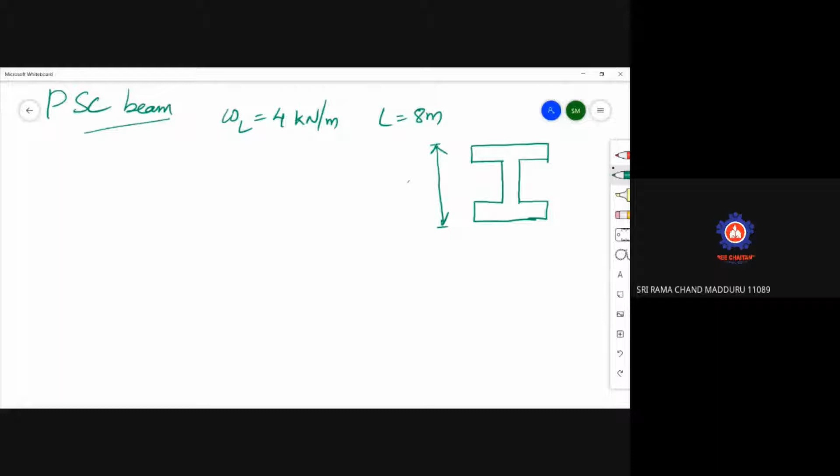The beam has an I section as shown in figure. So this is an I section. You can draw this diagram. So this is a symmetrical I section. So the flange thicknesses are 60 mm, web thicknesses are 80 mm.

The beam is to be pre-stressed by an effective pre-stressing force of 235 kilonewtons. So capital P is equal to 235 kilonewtons.

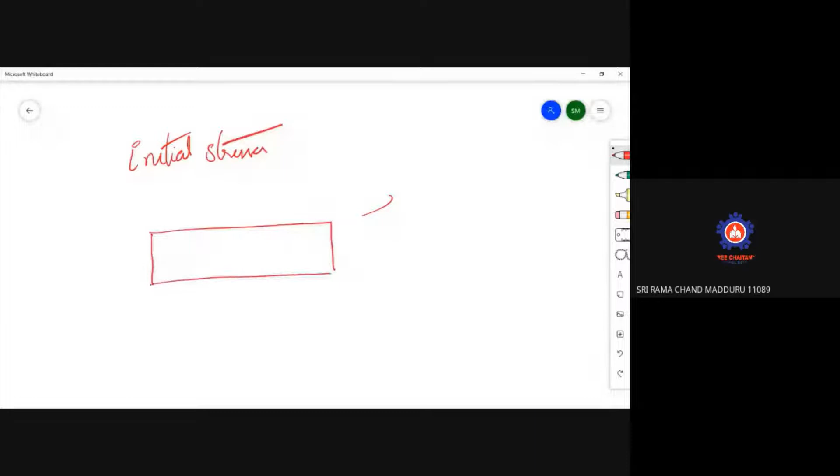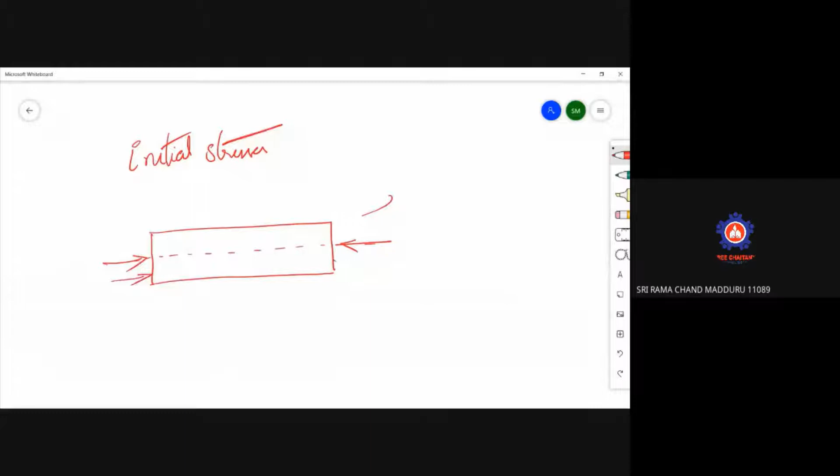So just understand this sentence: the stresses across the section are practically compressive. That means if your beam is there, for a pre-stressed concrete beam, we are applying a pre-stressing like this. Whether it is below the neutral axis or above the neutral axis, at an eccentricity of E, in such a way that for the entire concrete beam, if you take the cross section either at the central section or at the support section, the resultant stresses should be compressive.

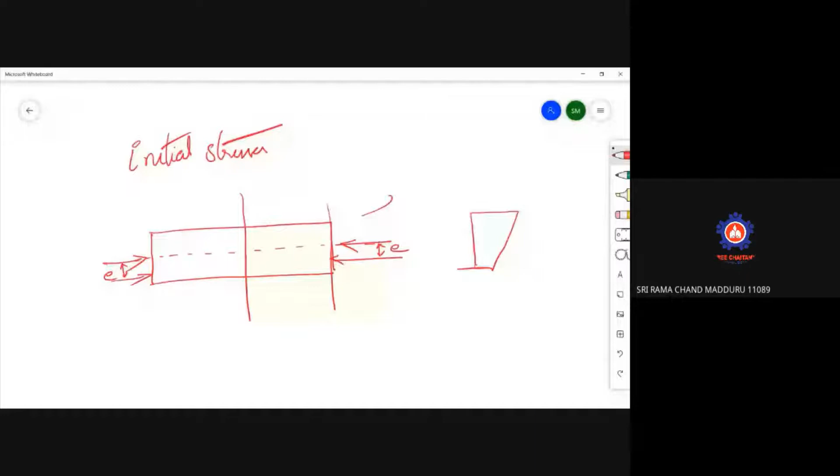That's why we have analyzed the beam, how to calculate the resultant stresses. On the entire cross section, there should be compression. Just understand here, the loading you can't avoid. Why? Because the loading is coming according to the requirements of the building. So what we can do is play with only the pre-stressing force as well as the eccentricity E.

Sometimes you can change the dimensions of the cross-section of the beam, but sometimes the dimensions of the beams are also restricted. So the main thing is you have to provide the pre-stressing force as well as the eccentricity in such a way that the stresses are within the limits. Since we are providing it in a planned manner, we call it PSC, pre-stressed concrete.

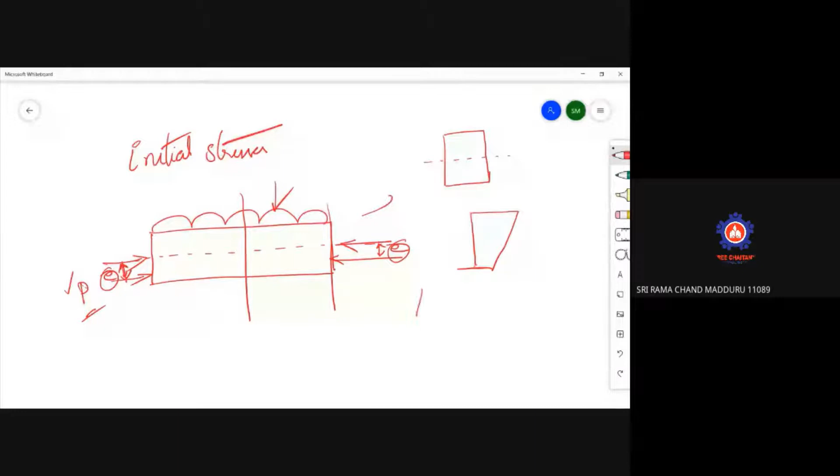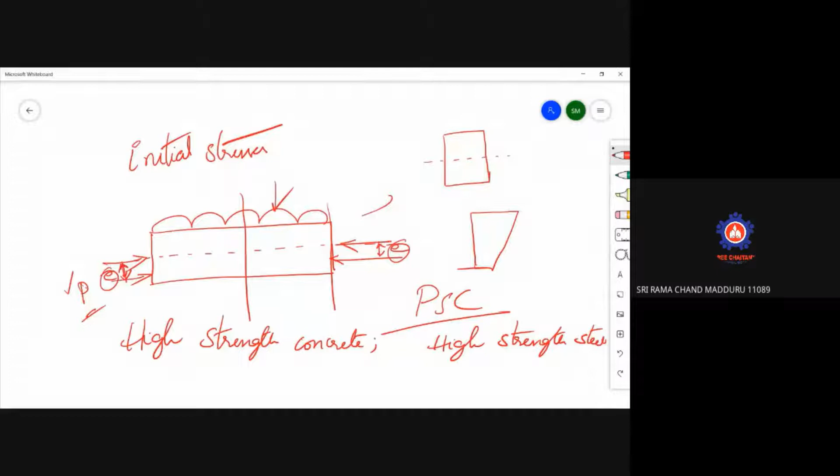For this, we require specific types of materials. We require high strength steel as well as high strength concrete. Let me tell you why it is happening. So note down just one point: high grade concrete and high tension steel wires are used.

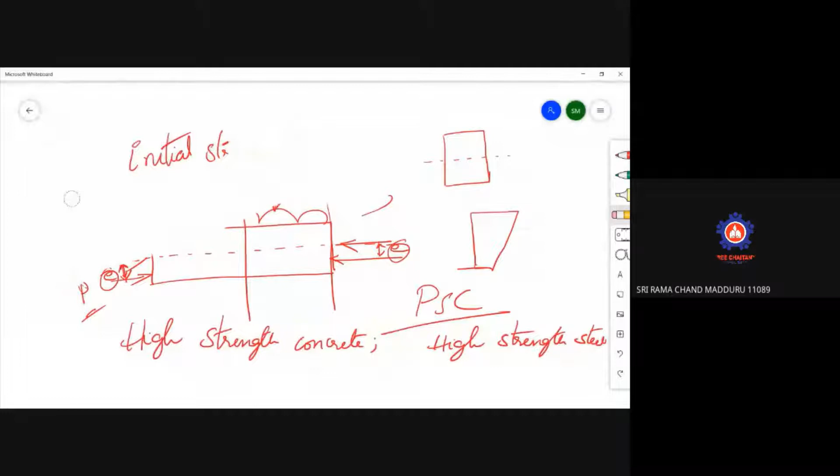High grade concrete and high tension steel wires are used. Steel wires are called tendons.

Okay, now I will go to the types of pre-stressing. Just keep the heading: types of pre-stressing. In the types of pre-stressing, these are majorly classified into two: one is called pre-tensioning, and another one is called post-tensioning.

Today we will understand these two terms, as we have only 10 minutes. In these 10 minutes, we will see what is meant by pre-tensioning and post-tensioning, what the words actually mean. We call it pre-stressing because initially you are doing pre-stressing before application of the external loads. The word itself says it. This pre-stressing is again divided into pre-tensioning and post-tensioning.

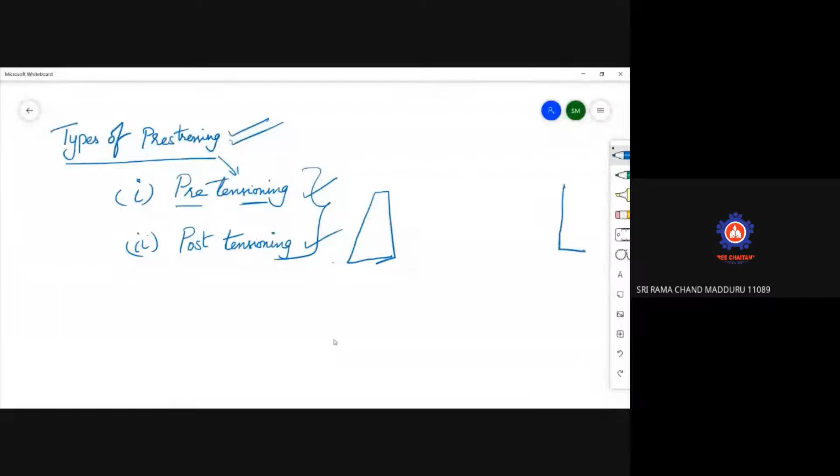Now the word again, pre-tensioning. That means you are applying the pre-stressing to the member before the concrete is poured. So in the case of pre-tensioning, first of all, there will be two abutments. The purpose of these two abutments is that the steel wires will be placed here like this.

Before the concrete is poured, first of all the molds are set, concrete molds are placed here. Wherever the tendons are required, the tendons are provided as per the design. We will do the design also here. So first the empty molds are placed. Now between the two abutments, the steel wire is placed and it is pre-stressed. One end is fixed here and you apply a force using equipment. We will also see that equipment and how to do pre-stressing. So we apply a pre-stressing force.

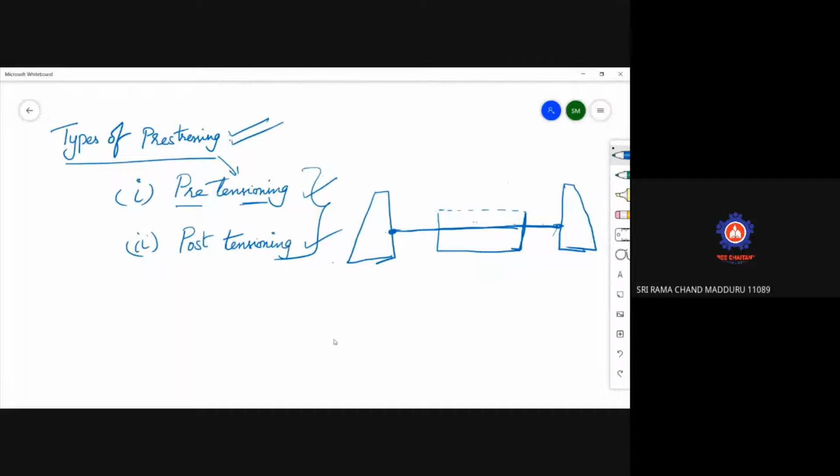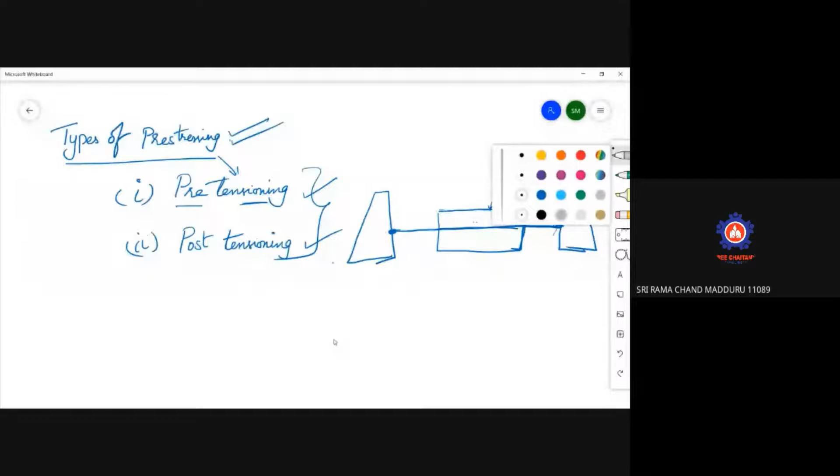So before the concrete is poured or before the concrete attains its strength, you are doing pre-tensioning, which means you are doing pre-stressing. Afterwards they pour the concrete. So after pouring, this is our concrete, poured here like this. After pouring the concrete, these tendons stay placed like this until the concrete attains its strength.

When the strength is achieved, they do cutting here. They use cutters and cut it here like this. When they cut it, this element will be taken out. So what are you doing here when you are cutting it? Just understand, that is the concept. First of all, the wire is under tension.

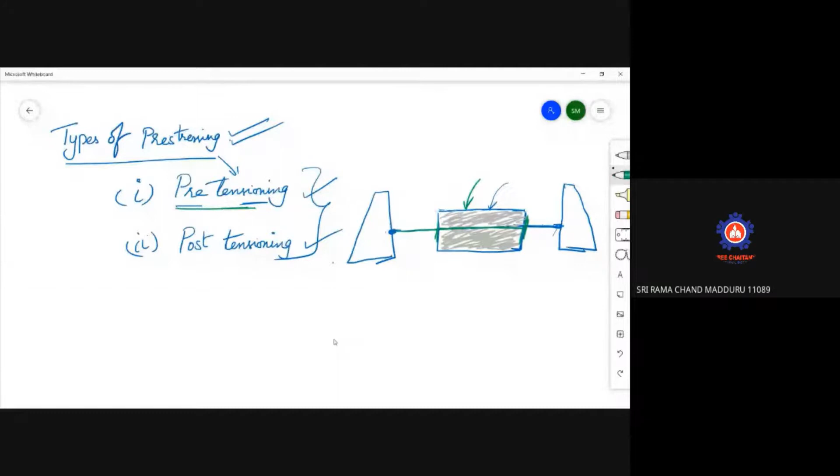You are initially doing pre-stressing. Once again I am repeating, listen to this one. I will talk regarding pre-tensioning today. So in pre-tensioning, what is happening is, here one abutment will be there. Why? Because to place your steel tendon or wire, a tendon will be placed here.

So here one end will be fixed. Now at the other end you will tighten it. When you are tightening it, the wire will be pre-stressed. So simply you will hold here and pull on this side, and the member will be tensioned. Before tensioning, they will place the concrete molds as per the required dimension. They will place them here and pull it, applying pre-stressing.

When I am applying pre-stressing, they will pour the concrete here. After pouring the concrete, we know that concrete requires 28 days to achieve its strength. So till 28 days it will be placed here, or as per the required strength. It need not be 28 days. If the member is achieving its required strength, you can cut it here. At the ends, the wires are cut and you will take it outside.

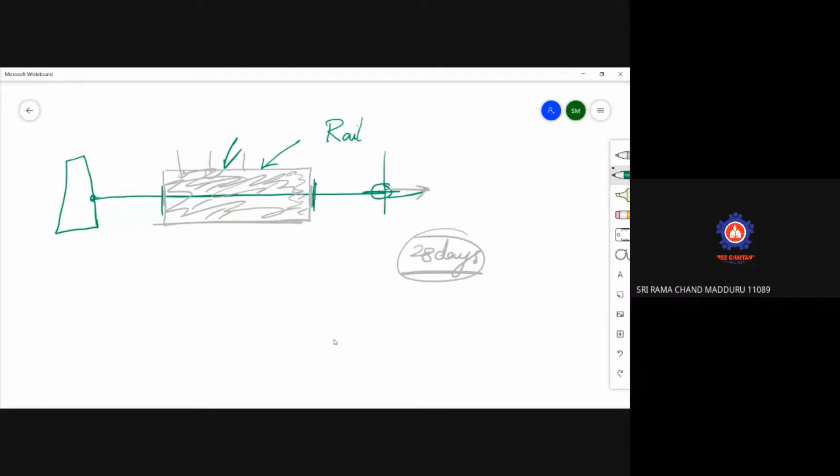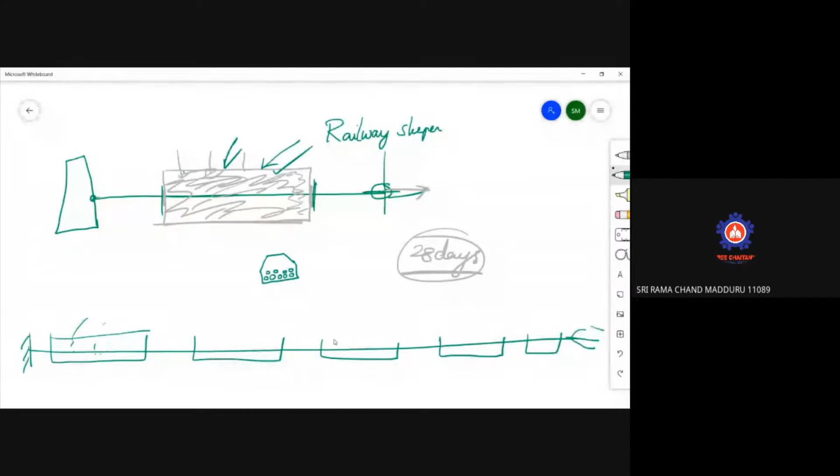First of all, a wire is provided over the entire length. One end will be fixed, the other end will be tightened using the equipment. Pre-tensioning will be done. Here a series of molds will be placed, and in one stretch the concrete will be poured. Here I am drawing only one single line; as per the required number of tendons, you will draw the required number of lines.

When I call it a tendon, this is nothing but a group of steel wires. These steel wires are called tendons. Now the concrete will be poured. After the concrete achieves its strength, you will cut it here. When I am cutting it and taking out the element, what happens?

Simply try it: take a rubber band and pull it. When you pull it, the rubber band will be under tension. When you release it, it tries to come back. When it is trying to come back, the problem is that the surrounding concrete is there. This will not allow it to slip.

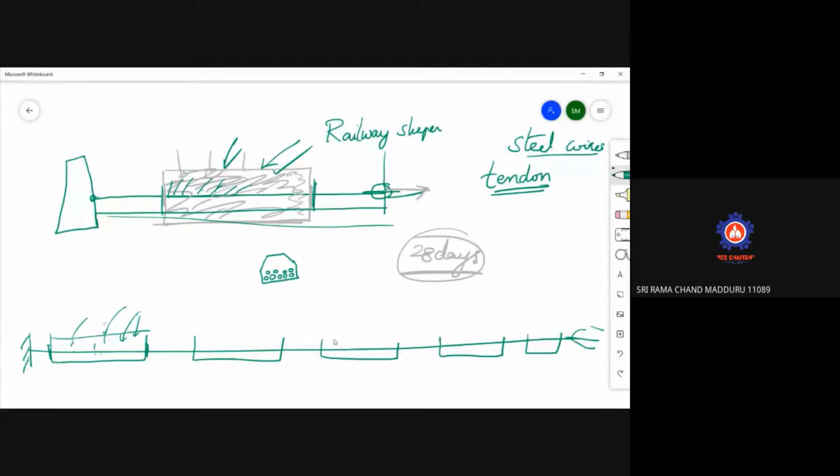So your member is like this, and you initially pull it. Your member is under tension. When you cut it, the member tries to come back like this. But the surrounding concrete will not allow it. So when it is trying to come back, it will induce compressive stresses.

Take a simple rubber band and release it. It will try to get back to its original position, but the surrounding concrete is there. This surrounding concrete has a good bond with the steel, so the compressive stresses from the steel will be transferred to the concrete through the bond between steel and concrete.

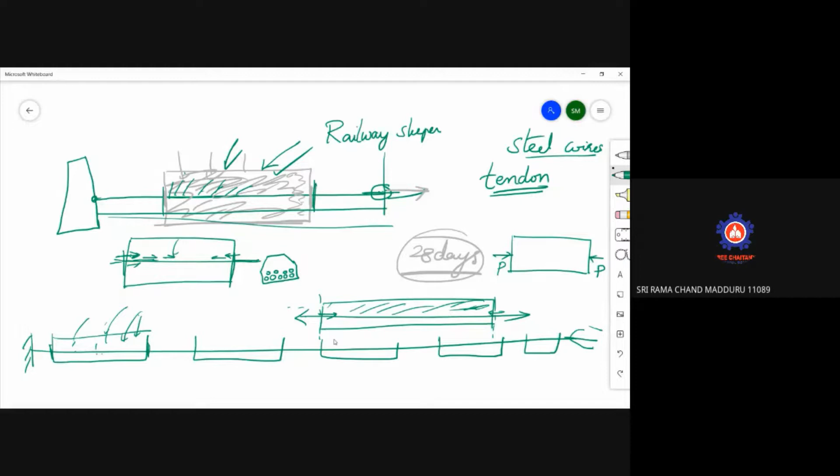That's why in the problems I am writing it as a pre-stressing force. But how is it coming? The member is initially stressed like this, and when it is released, the member tries to get back, but this is not possible as the surrounding concrete is there. Due to this surrounding concrete, a proper bond exists in pre-tensioning, so the compressive stresses will be transferred. This is the idea in the case of pre-tensioning.

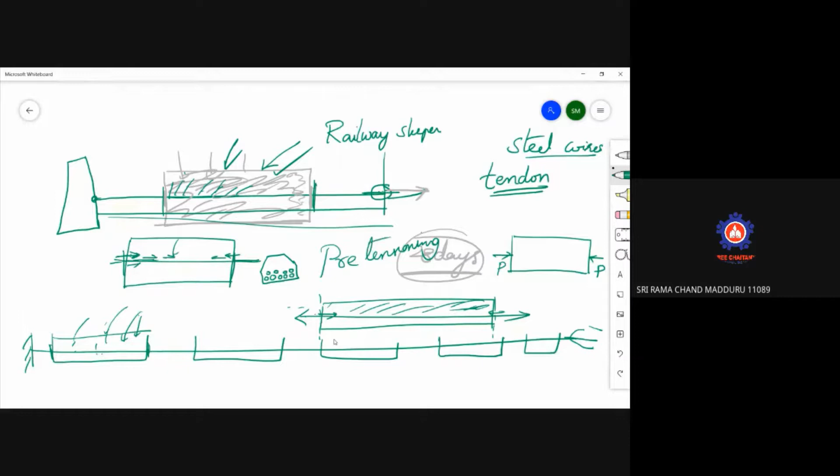So in the initial class, first day class, I tried to explain to you the history of pre-stressing. In the history of pre-stressing also the same thing happened. Take a wooden barrel like this. In the olden days, they used to store wine in these wooden barrels for longer durations. One person observed that when the grape juice was poured inside, it created pressure on the surrounding members, and due to this the barrels were broken; they did not have good stability.

So for this purpose, they provided a steel rim or a string around the barrels. These are metal rims; it may not be steel. When the metal rims are provided and they are in tension, they give compression to the surrounding material. So that is the idea of pre-stressing. The material, whatever you are considering, will be under tension, but it will exert compressive stresses.